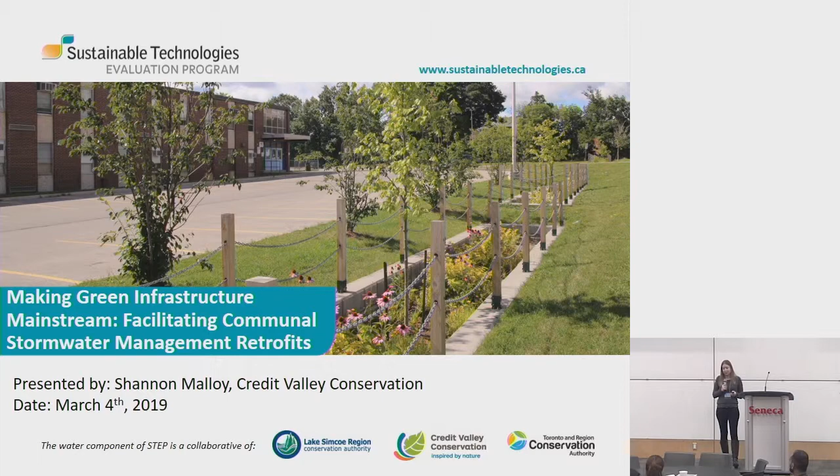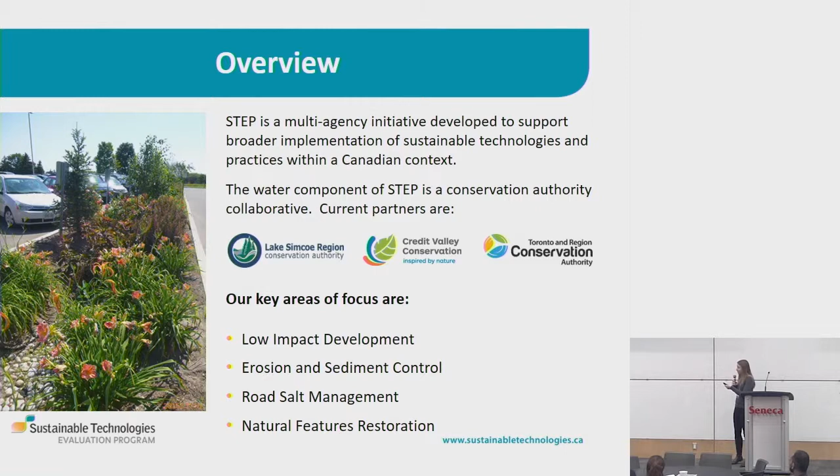You've heard the term STEP program thrown around the room a little bit today. That's the Sustainable Technologies Evaluation Program, split into two sectors: the energy side and the water side. The water side is a partnership between 3 conservation authorities: Credit Valley Conservation, Lake Simcoe Region Conservation Authority, and Toronto and Region Conservation Authority. The bulleted list on this slide shows the key points of the water side of the STEP program, and LID is the first one, showing how the topic of this conference fits into the overall program. This presentation will focus on that first bullet point for LID.

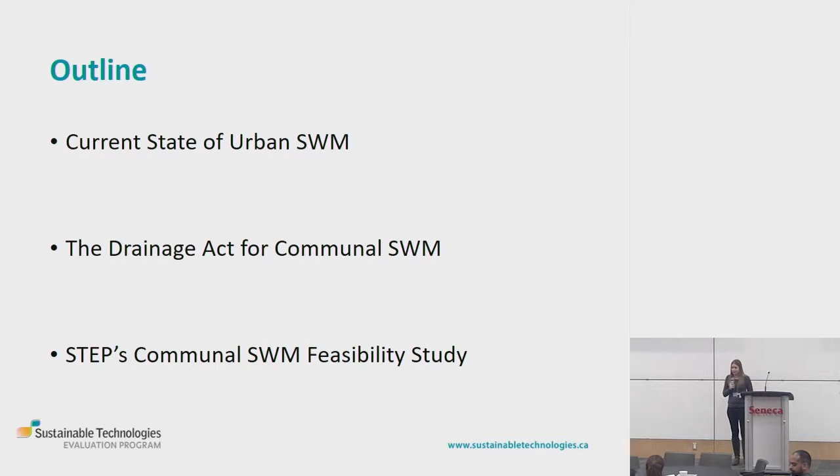So an outline of my presentation: first, looking at the current state of stormwater management through the focus on the Credit River Watershed. From there, exploring how we can use this piece of provincial legislation called the Drainage Act to help facilitate getting these communal, larger scale, multi-property low impact development projects in the ground. And finally, presenting a study that CVC is leading looking at the technical and financial feasibility of these communal stormwater management systems.

To kick it off and get our bearings, this is the footprint of the Credit River Watershed. The headwaters and upstream areas are on the north end in Orangeville, and the Credit River discharges in Mississauga directly into Lake Ontario.

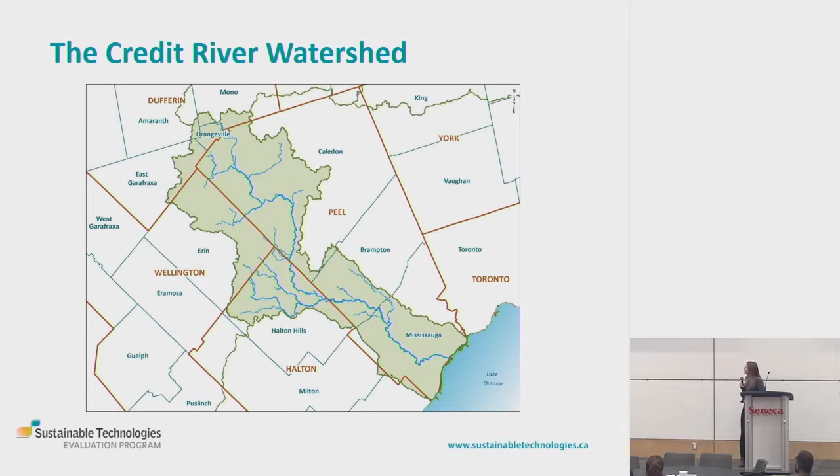Another recurring theme we've heard multiple times today is climate change — that's another threat to water management in our watershed. And also the state of stormwater infrastructure: in some cases it's not even existent in developed areas, and where it does exist, there are capacity issues and it's aging.

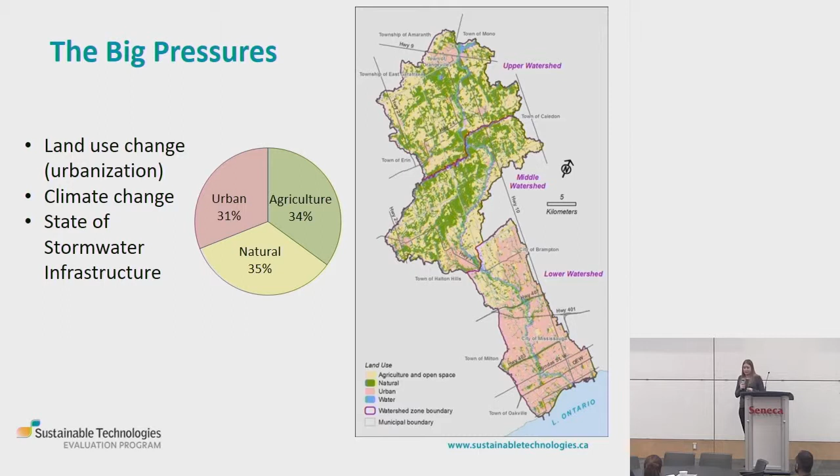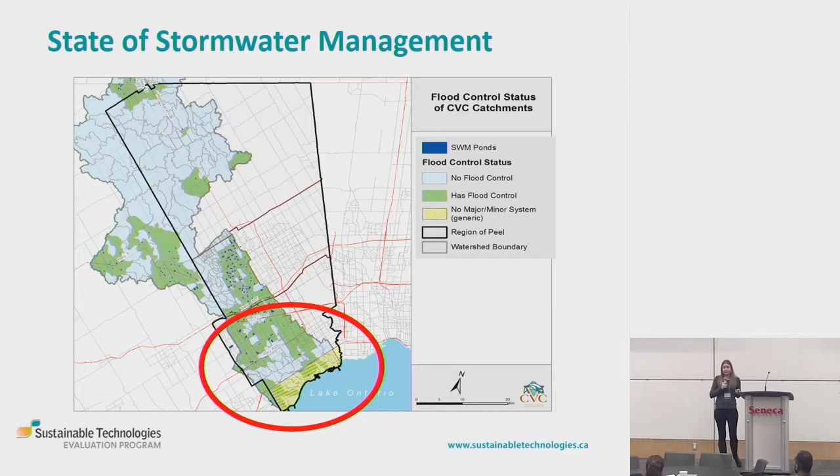So these are some of the big pressures facing the watershed, but to focus more on the stormwater side of things, this slide shows the state of stormwater management across the watershed. The light blue areas have no flood control and the green areas do have flood control. Thinking back to the previous map, a lot of urban areas like Halton Hills, Orangeville, Brampton, and Mississauga have flood control. But in the South Mississauga part of the watershed, there's a lot without flood control. This is the area developed in the 60s, 70s, 80s, before storm ponds, so there's a lot of legacy development in the most densely populated part of our watershed that has no flood control.

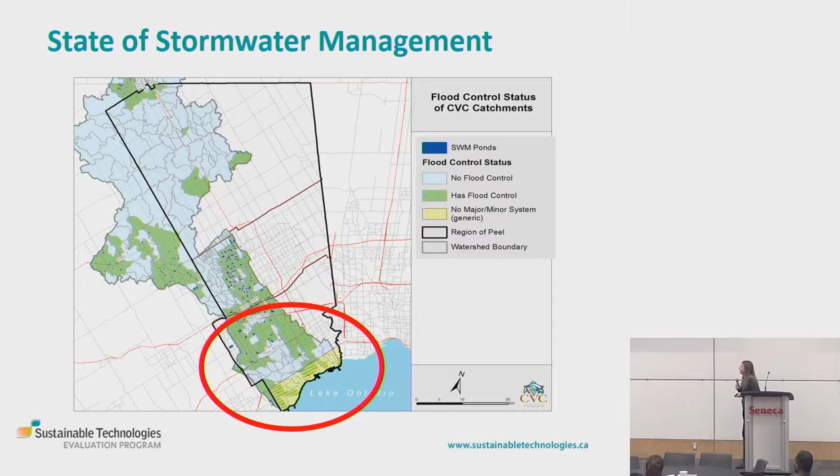So we see evidence of some of these problems throughout our watershed.

Not a statistic that as a conservation authority we're proud of, but that's the reality. We have water quality issues in our watershed. And that's not from a couple industries putting their effluent into the Credit River or a couple wastewater treatment plants. That's from thousands of parking lots, thousands of driveways, thousands of kilometers of paved roads.

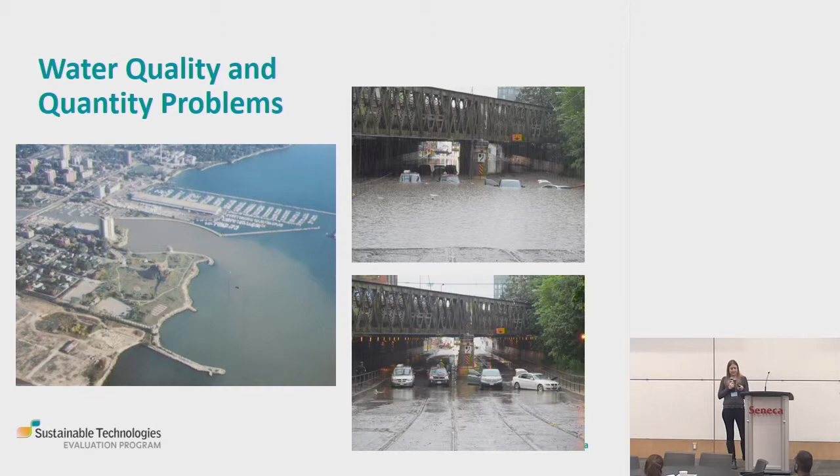But a lot of the cause of this has been due to the legacy of how we've been managing our stormwater, or conventional stormwater management. Conventionally, municipal infrastructure for stormwater management gets put on public property, either within the road right of way for conveyance, or end of the pipe stormwater treatment facilities like stormwater ponds. Well, they each have advantages and disadvantages.

Managing stormwater in the road right of way is logistically very difficult because you're competing for such a small amount of space. If you pull up the asphalt and the concrete within the road right of way, it'll look like spaghetti. You have your water mains, sanitary sewer, gas lines, telephone cables, hydro, Rogers, you name it, it's in the road right of way. So competing for space and doing any meaningful stormwater management in the road right of way is a challenge.

Stormwater ponds, on the other hand, we know they're great for flood control, but they take up a lot of space and urban land is expensive. They also have a large price tag for construction and rigorous maintenance requirements. So you have these right-of-way and end-of-the-pipe stormwater management features all on public property, but the percent of the urban land fabric that is public property is only about 20% or less. So municipalities are doing all of their stormwater management on about 20% of the land fabric.

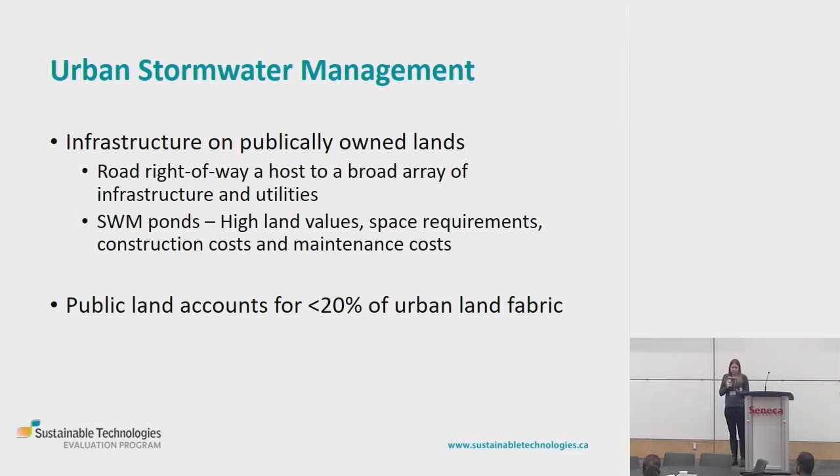So we have evidence of what the problem is. The reason we're here today, and the solution, is low impact development. So it's those source controls that infiltrate and filter water wherever it falls - get it into the ground, filter it, clean it where you can, where it falls.

Now, as a CA and as a partner in that Sustainable Technologies Evaluation Program, we've been monitoring LIDs for about 10 years now and developing guidance documents. We have a planning and design guide, construction guide, monitoring guide, and that's just our organization. There's many other agencies doing similar work, but we know they work. We've seen the performance of them, but why aren't we seeing that wider scale uptake?

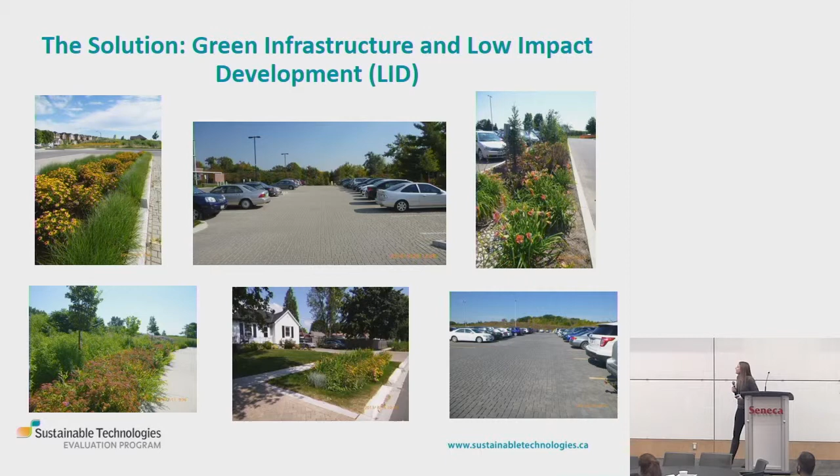And even some municipalities - their residents and business owners pay an annual stormwater utility fee, and some municipalities will offer a rebate if you implement stormwater management controls on your property. City of Mississauga is one of those municipalities that'll offer a rebate, but even with the incentive, the payback period for landowners is still far too long to really drive a business case to facilitate wider scale uptake of low impact developments. And on top of that cost barrier, there's not really a clear implementation framework for landowners to navigate getting stormwater management on their properties.

Every landowner would be responsible for hiring an engineer, reviewing those drawings, deciding what they want to see and don't want to see on their property, and navigating the permitting process. This puts a lot of administrative burden on each individual property when you're looking at lot by lot retrofits.

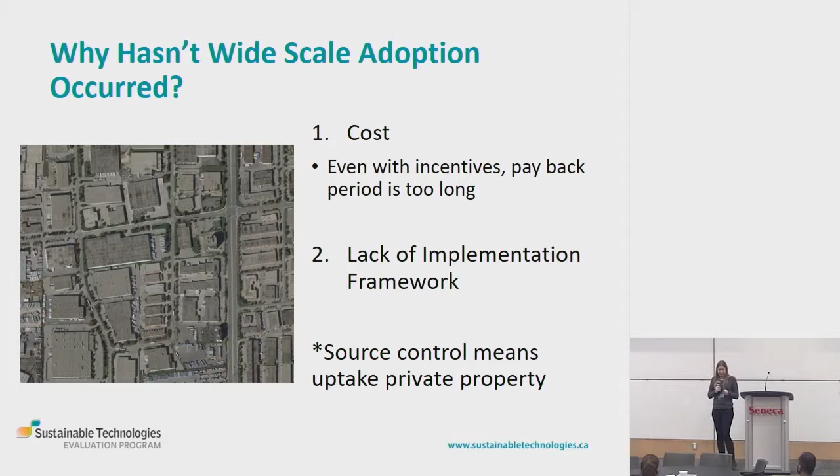So a situation like this could potentially be a win-win situation for the municipality and for the landowners, because the municipality is now meeting their stormwater management targets, and these landowners are getting a stormwater credit. So a situation like this could be a win-win scenario.

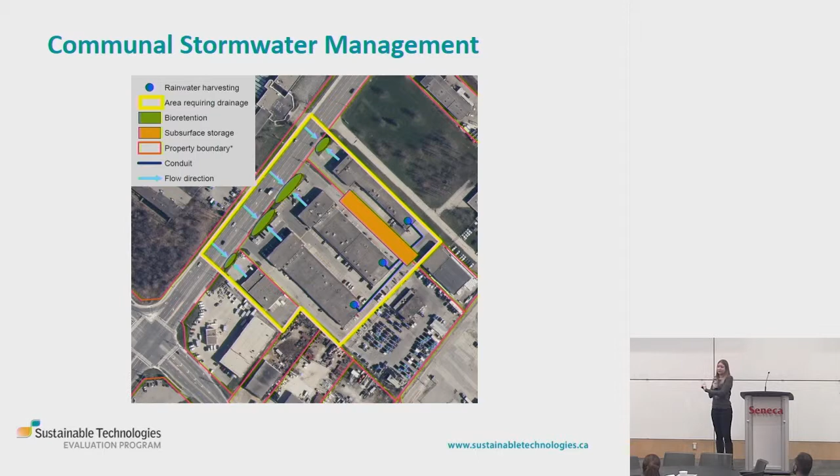But how do we get a communal system like this into the urban land fabric today? That's where this Drainage Act piece comes in.

The Drainage Act is a piece of provincial legislation, unique to the province of Ontario, and it's been around in some form or another for 180 years. For a piece of legislation to stick around that long, it has to be pretty good at what it was intended to do. And it's not your typical regulatory legislation that you might know more about.

It's more an enabling legislation. It's for anybody in Ontario to have improved drainage. So if you own land in Ontario, this is a tool that's open to you to use - residents, businesses, municipalities - if you own land, you can use this tool.

Now, traditionally, the Drainage Act has been used more in that rural context. As you can see, the governing body of this piece of legislation is the Ontario Ministry of Agriculture, Food and Rural Affairs, and it's been used more traditionally to provide a legal outlet for agricultural tile drainage systems.

But nowhere in the Act does it specify that it can only be used in rural areas, and there are a lot of examples of when the Drainage Act has been used for urban stormwater management in municipalities.

Ultimately, there are 3 fundamental elements of the Drainage Act, of systems that are constructed under the Drainage Act: 1, they're community projects; 2, they gain legal existence; and 3, it's municipal infrastructure.

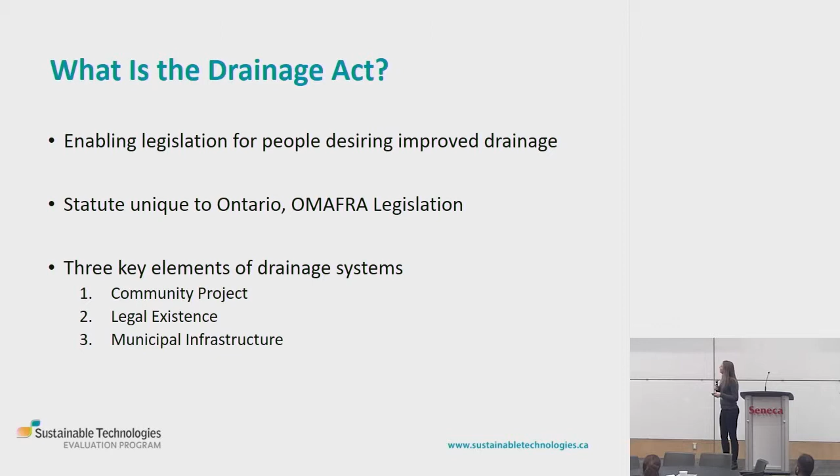So to avoid reading a nearly 200 section piece of legislation, here is the Drainage Act process in a nutshell. It gets kicked off when a landowner submits a petition to the local municipality for improved drainage. From there, the council of the local municipality, in most cases, will appoint an engineer to the project.

The engineer is responsible for going on site, surveying the drainage issue, and then developing an engineer's report. In that report, they include the design of the drainage system and a cost estimate of the drainage system.

It's the engineer's responsibility to do a cost distribution to get that system in the ground. In that engineer's report, the engineer also includes provisions for future maintenance, laying out the cost of who pays what when this system gets maintained in the future. Whoever uses this drain and benefits by it typically gets assessed a cost, so it's a cost sharing between the municipality in some cases, and landowners. It really is a communal project where multiple properties come together to share in the cost of one drainage solution.

Once the engineer's report is completed, it gets read by council three times and adopted as a bylaw. From there, the system gets constructed, and then it also gets inspected and maintained. That's the role of a municipal employee called the drainage superintendent, who is chiefly responsible for the inspection and maintenance of these features.

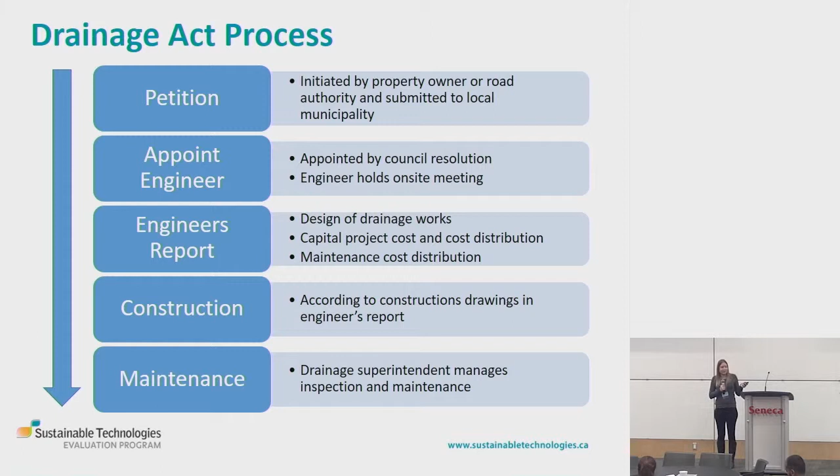Just to highlight some of the performance efficiencies and cost optimization pieces you can get out of using a tool like the Drainage Act: for performance, since you're no longer limited to the confines of your single property parcel, you can start to do infiltration where the soils make sense, and do work along and across property lines. This has typically been a relatively underused space of the urban land fabric.

You might see a grass swale between property lines, but communal projects give more opportunity to have a bit more elaborate drainage system in those areas of the land.

Aggregating multiple properties together, you can share synergies between your neighbors. For example, I might have a large warehouse on my property that's really good at harvesting rainwater, but I'm not a high-end water user, so I don't have much use for it. But my neighboring property is a shipping yard for trucks, and they wash vehicles on site. So under this communal stormwater management scenario, I could have my rooftop water harvested to go to my neighbor's property for their truck washing needs. That's just a couple examples of performance efficiencies you can find by aggregating properties together communally.

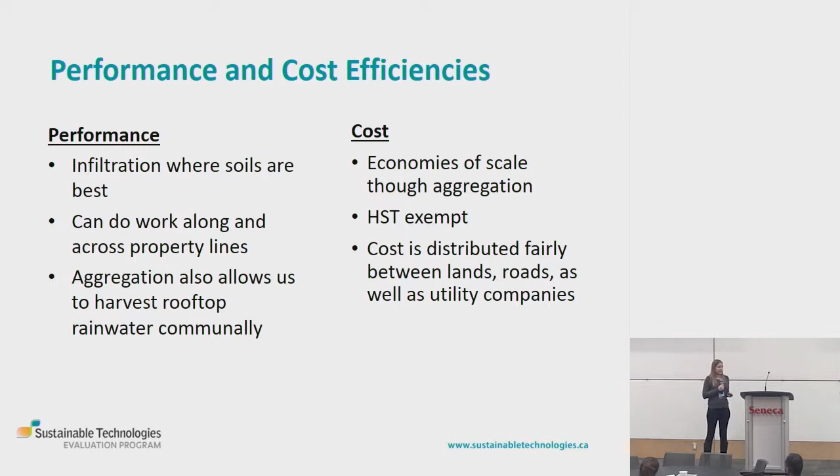Also on the cost side of things, under the Drainage Act process, it's the engineer's responsibility to fairly distribute the costs of the project. They can't just go rogue and assess costs to whoever for whatever reason. There's certain criteria set out that they have to assess costs under. I've listed them all here—I'm not going to go into any length of detail, but it really is up to the engineer's discretion, and the whole fairness test is put into play in the cost distribution side of things.

Implementation framework: the Drainage Act process is a step-by-step process that landowners, businesses, or residents can follow, and they don't really have a lot of administrative burden on their heads through the Drainage Act process. A lot of it is administered by the municipality. In terms of the engineer's report, that's the engineer's responsibility. So a lot of the administrative burden isn't on the private property owners when you use the Drainage Act process.

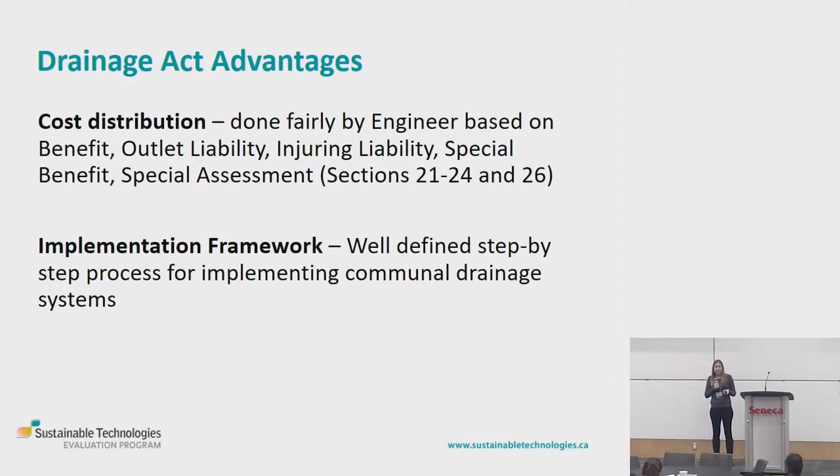It's a 180-year-old piece of legislation to get drainage projects into the ground, so it has that well-defined step-by-step process.

A couple other advantages of using the Drainage Act: because the engineer's report gets adopted as bylaw, that gives these systems legal existence. So if anyone damages or obstructs drainage works constructed under the Drainage Act, they can be liable for that. And it's not always just your drainage features—if tree planting was included as part of this drainage system, and if those trees were included in that engineer's report, then those too would be protected.

On the inspection and maintenance side of things—if we're putting these drainage systems on private property, how do we ensure they get inspected and maintained when needed? The municipal employee called the drainage superintendent has core responsibility for inspection and maintenance, but that doesn't mean a landowner can't inspect the section of the drain on their property. If any landowner notices a deteriorating condition, they can notify the municipality, and the municipality has to act on that.

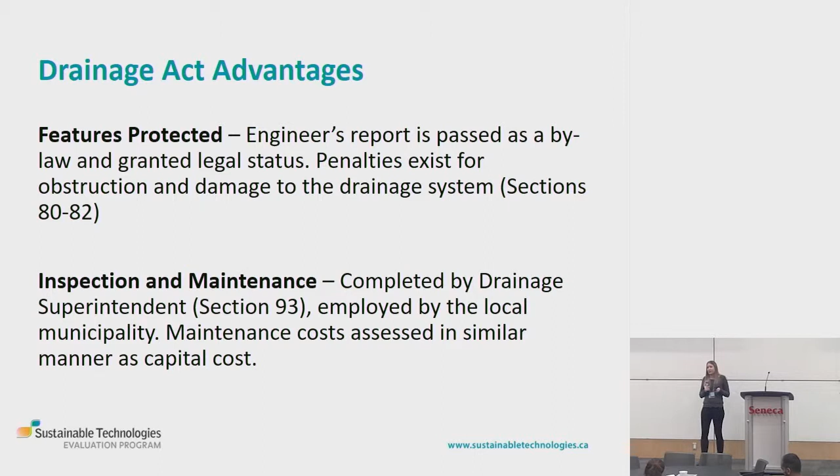So I find that the Drainage Act really balances the interests of the landowners as well as the municipality. I hope highlighting some of these cost and performance efficiencies starts to answer the question: why can't landowners just aggregate themselves? Because you're ensuring these features are protected, you do a fair cost distribution, it's a step-by-step process, and maintenance is ensured. So there are a lot of reasons that make the Drainage Act a really attractive piece of legislation for urban stormwater management.

We've been exploring these communal stormwater management systems at our CA in more detail over the past couple years, and we've engaged in a feasibility study looking at the technical and financial feasibility of these systems. On the technical side, that's more the engineering side—is this technically feasible? On the financial side, what's the cost benefit of these aggregated stormwater management systems? Do we actually have a business case for taking this aggregated communal approach to low impact development implementation? Those are some of the questions we're looking to answer in this study.

We've selected an area in the southwest end of Mississauga to look at. We're working with about 13 property owners—we approached 14 about the project, and 13 have engaged with us during the preliminary phases. So the acceptance from the landowners has been quite remarkable.

We chose this study area for a few reasons. We'd already had previous relationships built with some of the landowners in this neighborhood. Another reason is that all these properties are eligible for the stormwater credit, a rebate on their stormwater utility fee. So if we implement something in the ground, these landowners will be eligible for a rebate on that charge they've been paying.

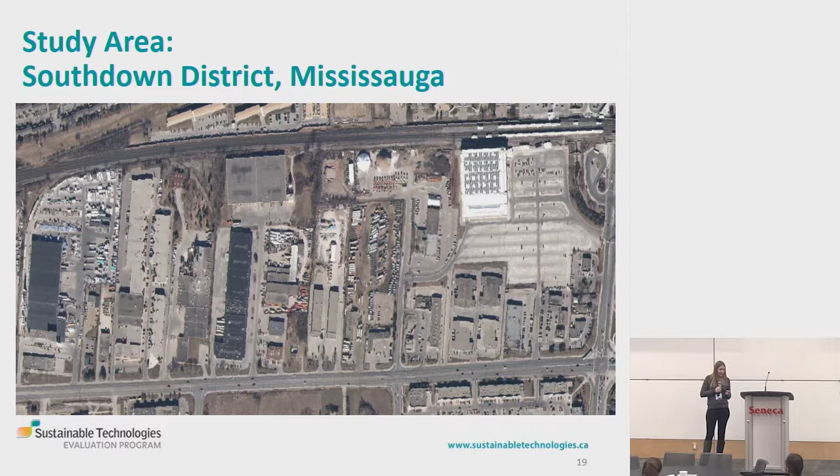The final reason we chose this study area—they all have drainage issues. Aside from the stormwater network that conveys water to the nearby Sheridan Creek, all these landowners have expressed drainage issues to us; they don't have flood control. One property owner says, 'I can't have my back warehouse doors open during a rain event because my warehouse floods.' Another landowner says, 'I have localized flooding every rain event, and that takes up parking spaces from my clients and customers,' creating challenges and disruption to business. So that's another key reason why we chose this study area.

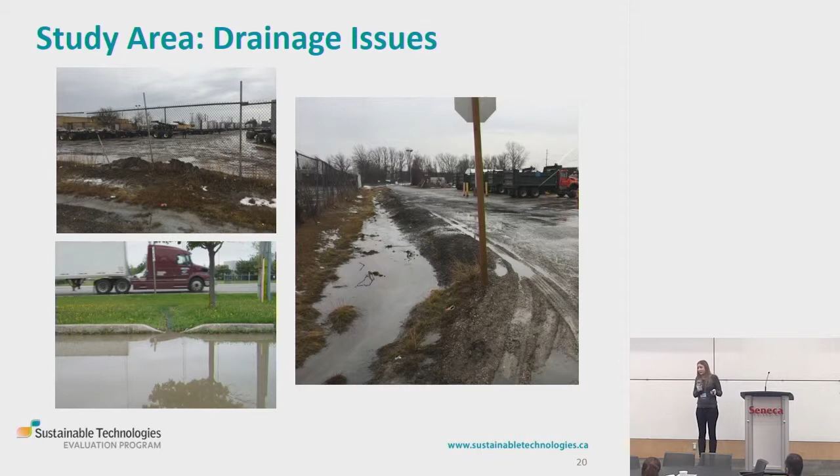These are some of the key steps on the engineering side of our project.

We kicked off last winter with landowner consultation. We met with all the landowners in the study area individually, and then also as a group. We put so much focus on landowner engagement because they dictate our constraints right off the bat. If they don't want permeable pavement on their property, that's not even going to be something we consider.

So we want to make sure we're working within their constraints right off the bat. Last summer and fall, we did a topographic survey of the study area, and we're working on cleaning up our base map. So now we're getting into the real engineering work and looking at some design scenarios.

We're going to build an existing conditions model to see how the current flows are for the study area. But we also want to do some aggregated communal low impact development design scenarios, and eventually compare that to what it would take to have that same level of service and treatment if all that stormwater were managed on public property. Ultimately, we'll compare the communal system to what it would take to do this on public lands, and hopefully we can make a positive business case for these communal low impact development systems.

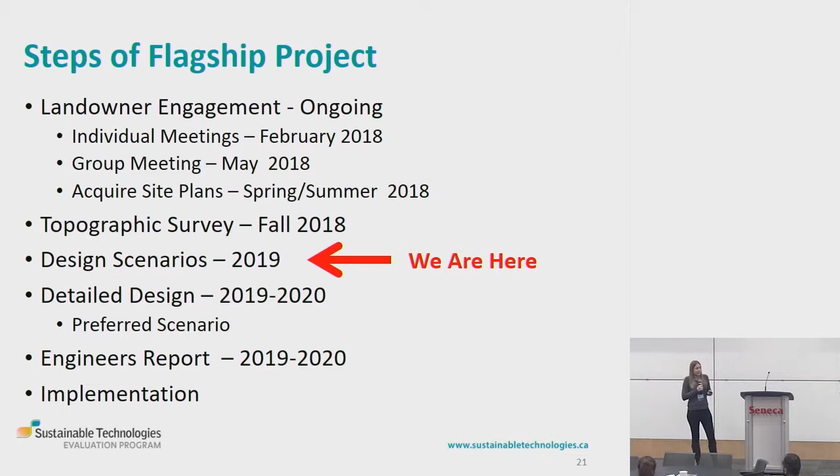I mentioned the other side of the project is the economic side. So briefly, we have these scenarios: our aggregated design scenario compared to what it would take to have that same level of service, but all being treated on public property. By doing that, you'll be able to do a cost-benefit analysis by looking at the savings of these communal designs.

A couple of presentations earlier in the morning talked about co-benefits like social wellness and having that green space. They might not necessarily be direct stormwater benefits, but these LID systems have various co-benefits. By stacking the benefits that each individual stakeholder receives, it starts to make a case for an enhanced or more elaborate incentive program.

Take our study area, for example. All of that runoff eventually flows into Lake Ontario, so MECP is now a stakeholder benefiting from a project like this. It's the Great Lakes, so Environment Canada benefits for the same reason. Downstream of our study site we have a provincially significant wetland, so MNRF benefits too. CVC benefits from getting swimmable, drinkable, fishable waters as well. So if you start stacking who all benefits...

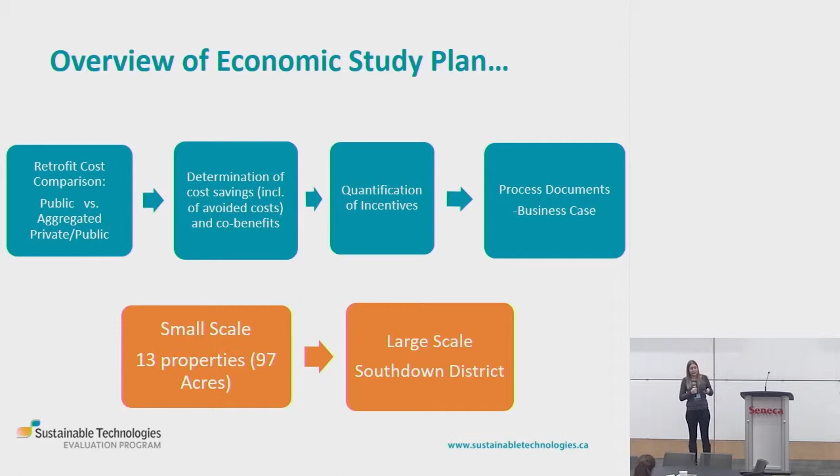We do have a web page on the Sustainable Technologies website, sustainabletechnologies.ca. Similar to the treatment train tool, if the first thing you Google is communal stormwater management, this is probably going to be your first hit, top 5 in most cases. On this web page we've written a paper exploring the Drainage Act process for urban stormwater management in a lot more detail, as well as a discussion paper looking at incentivizing stormwater management. Both the engineering and economic sides of the study are housed on this study website.

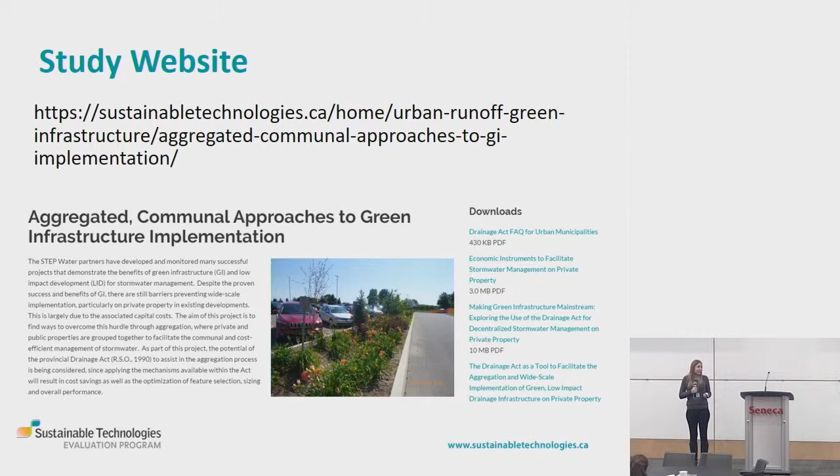And that's pretty much everything I had to say about LID and the project we're working on, but if there are any questions, I'd be happy to answer them.